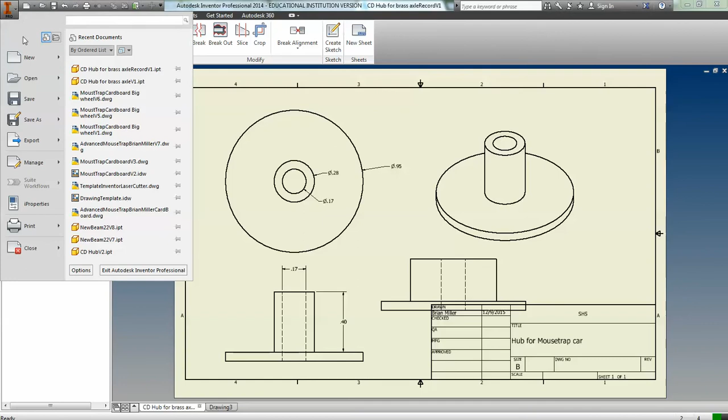Alright, so here's what we do. You're going to have to go make a brand new, and we're going to make a 2D drawing. Okay, so you're going to have something that looks a little something like this.

Alright, the next thing we're going to do is we're going to edit the sheet. Okay, well no, the next thing you're going to do is you're going to save it in your folder with your name on it as hub schematic. And if you don't have the hub, you can use whatever 3D part you do have. Any 3D part will work.

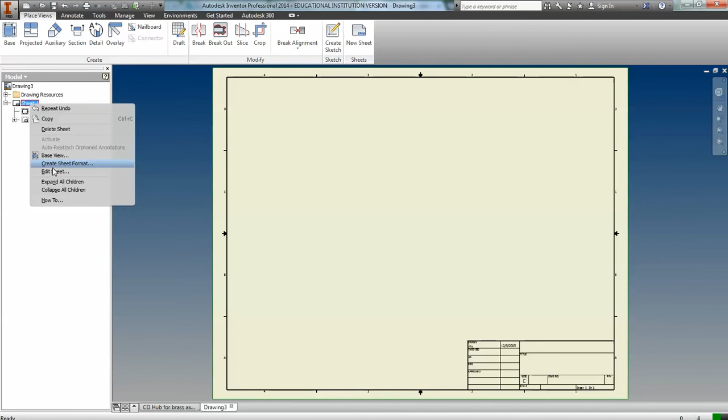Alright, so we're going to click on this, and we're going to edit the sheet. This needs to be smaller than 17 by 22, so we're going to make it a size B, 11 by 17. We can print 11 by 17 on my printer, and we're going to click OK.

Alright, the next thing we need to do is fill in the information over here. So you're going to click there, and you're going to double click on this, and then on this thing we want to fill it in, so you're going to click here on this guy and this guy. Let's see what it does.

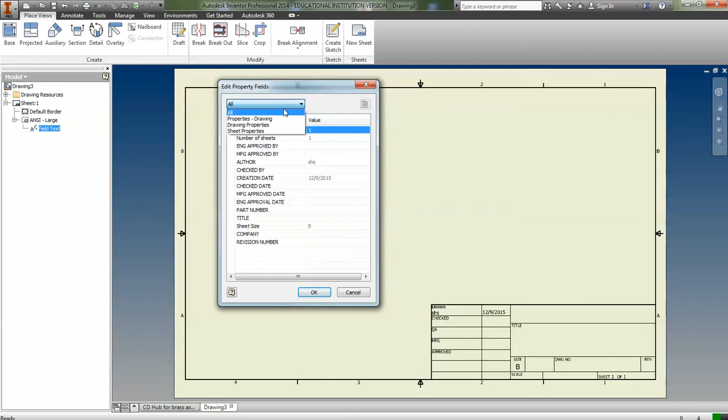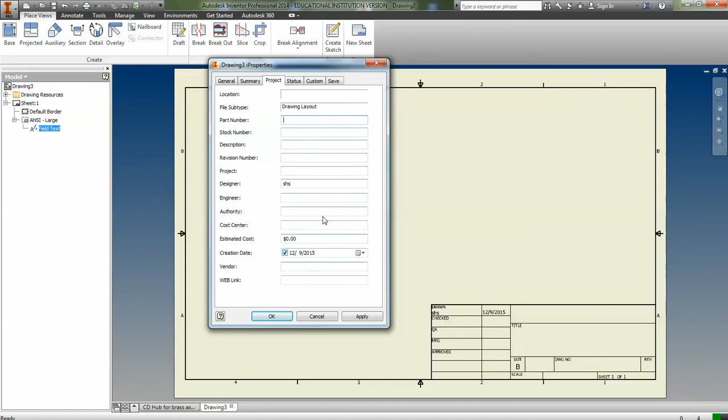Okay, so you're going to click on this and go to properties of the drawing, and then you're going to click on this, and you're going to look around and see what you can say. So you're going to give it a title of whatever you want this thing to be called. So this is going to be my hub for car. The author is Brian Miller. The company is whatever your team name is, so on and so forth. You're going to fill all this stuff out, look around and see if there's anything over here you want to do, and then you're going to click over here. So it should, at least you need your name and what this thing is, okay? Alright, and then we're going to click OK.

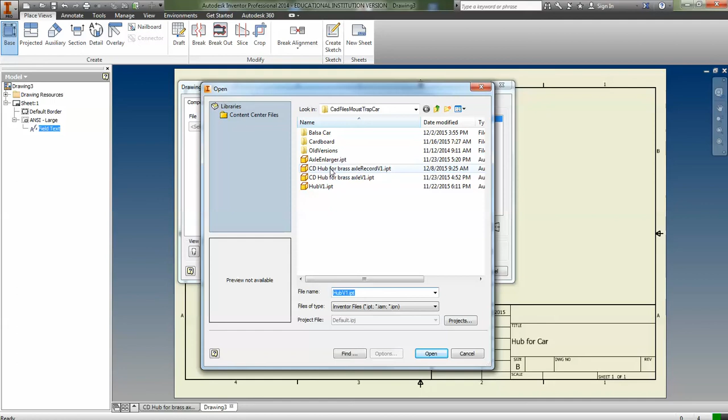Alright, now next we need to actually get a drawing in here. Now we're not going to redo a drawing, we're going to just place a drawing we've already done. So we come over here to place views, we click base, and we click on this folder right there, and we pick something that we want to use. So, and then I place it where it goes, okay?

And then it automatically gives me a top view and then a 3D view. And then I right click and I say create. And there they are. Okay, so next, and by the way, if you didn't get this one and this one, you can always go to projected and click on this and do another one. I'm going to hit escape and not do that. Alright, but at any rate, if you messed up.

Alright, now, let's go to annotate, and we're going to add dimensions. Okay, so we'll dimension this thing. Click OK. We need to tell it how big this is.

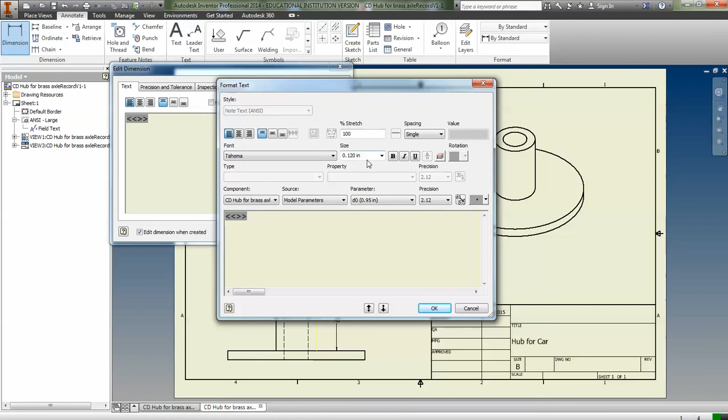You can probably change like the font size and stuff if you mess around with this. Make it bigger. You probably should. Okay, so let's make it a the font, whatever size. Let's make it that and see what happens. Okay, click OK. Make it easier to read.

All right, so go ahead and we'll dimension many of these things as we can. So I click here, we're going to go back dimension. We're going to click there, dimension that. Okay, we probably want to do a dimension of this and this. Okay, like that. Anyway, so we're going to dimension all this thing out.

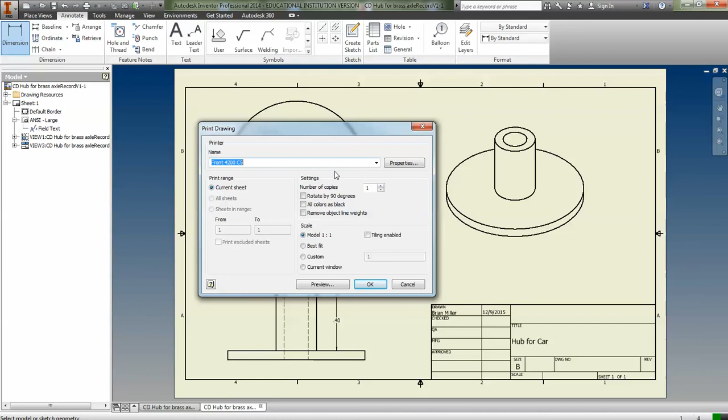And then when you have that all done, you're going to print it. So you're going to click on this, and you're going to go to print, and you're going to choose the 4200 front. Okay, and then you're going to do properties, and you want to make sure it's the right size. So we'll say 11 by 17. Make sure it says that. Click save.

No, we'll click OK, and then we're going to click OK, and we're going to print that thing. Okay, and then you're going to, when it looks good, you're going to turn that in. Very good. That's it.